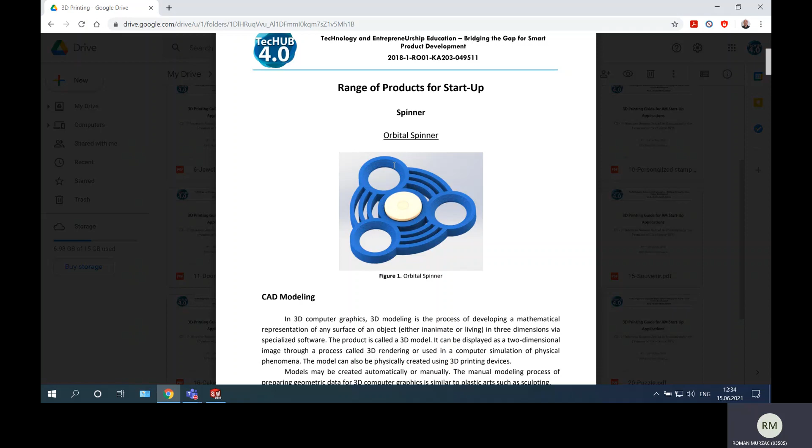Okay, so let's go. Let's see the first sketch. The first sketch is a circle of 22 millimeters.

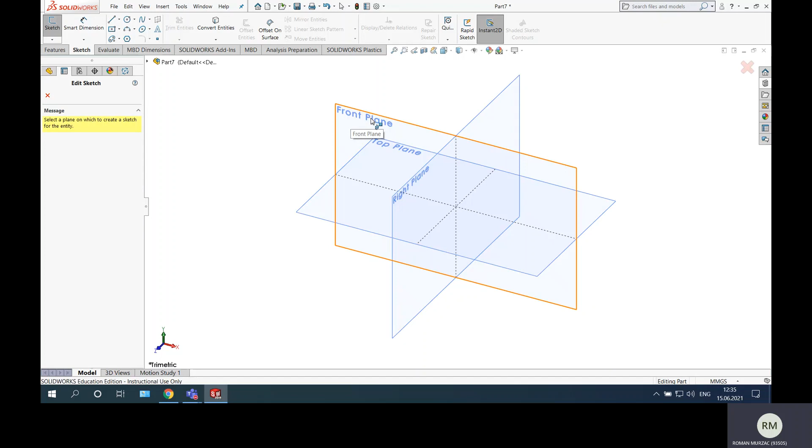Take a new part, open the part, and in this part create a sketch. First, switch to the sketch menu, take the sketch command, and choose a plane to create the sketch. Here we are. Take a circle, draw it from the center of the sketch, and put a dimension of 22 millimeters.

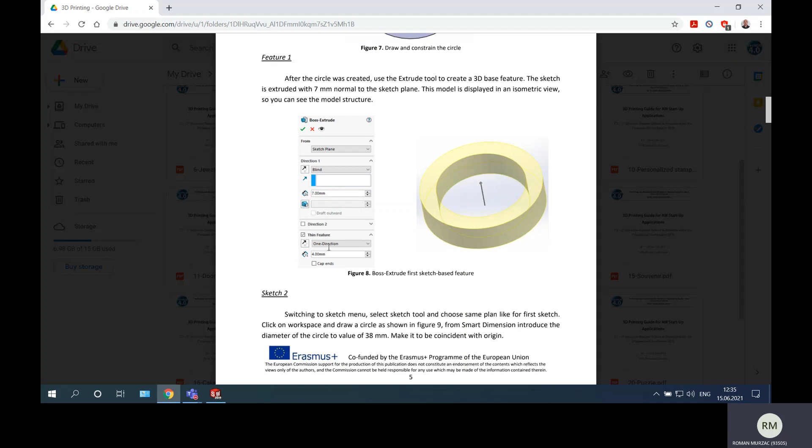This is 22. After that, exit from sketch, extrude it with 7 millimeters, and make a thickness of the wall of 4 millimeters, external, of course. Exit from sketch, go to features, take extrude, say 7 millimeters, and here put on thin feature and say 4 millimeters outside.

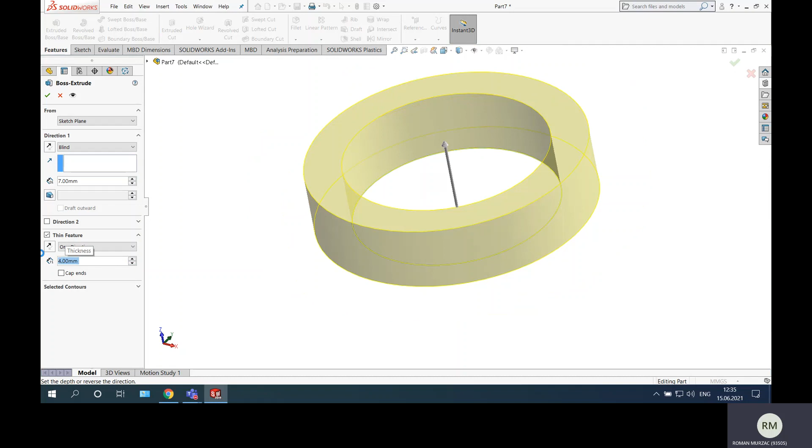And we obtain the ring. So now we have a ring here. Okay, let's see the second sketch.

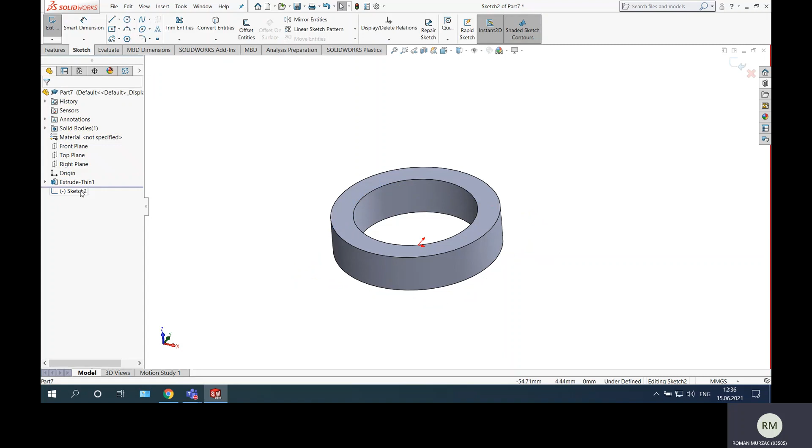The second sketch is a circle with a diameter of 38 millimeters. So just take the same plane, look perpendicular to it, and create a circle with 38 millimeters. I suppose the parameters for extrude will be the same.

No, it's not the same, it's 2.5. Here is the explanation why: because the first ring here will be a bearing. We will create an assembly and here will be a bearing, so this one should be 4 millimeters in order to be able to keep that bearing here.

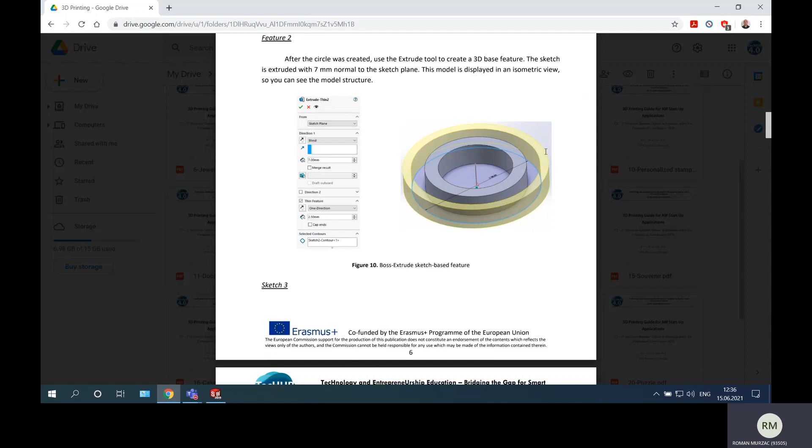The second one and the rest of the rings should be smaller, with a small thickness, just because they are a design element. So go to feature, extrude, again 7 millimeters same height, thin feature, and here is 2.5. Okay, so we had 2 rings already.

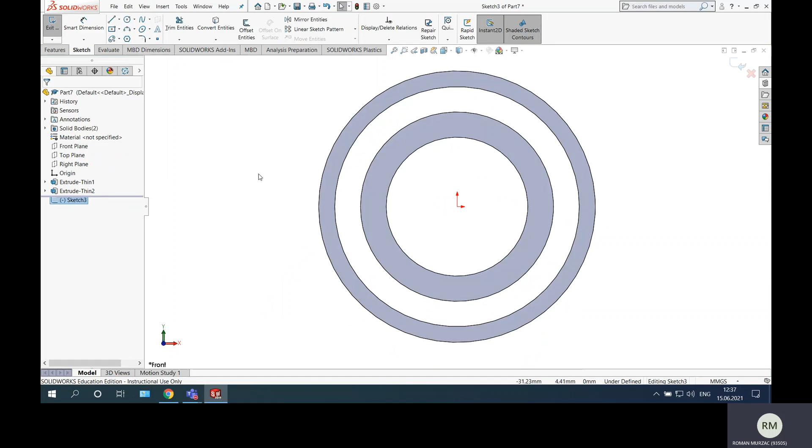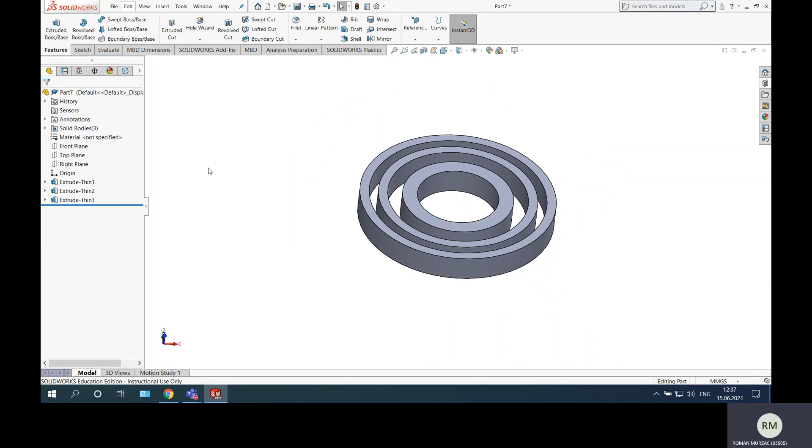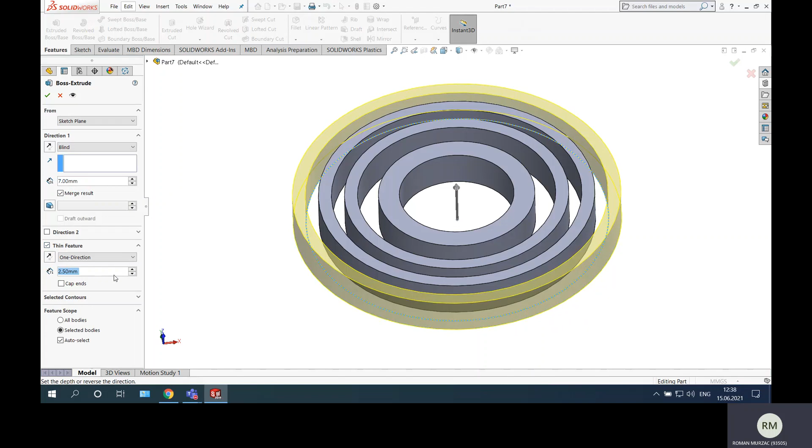And we have the fourth one, 58 millimeters. So repeat again, fourth time: 58 millimeters, like this, put the dimension 58, exit from sketch, rotate, go to features, take extrude 7, and here thin feature 2.5. Very good, so we have 4 rings now.

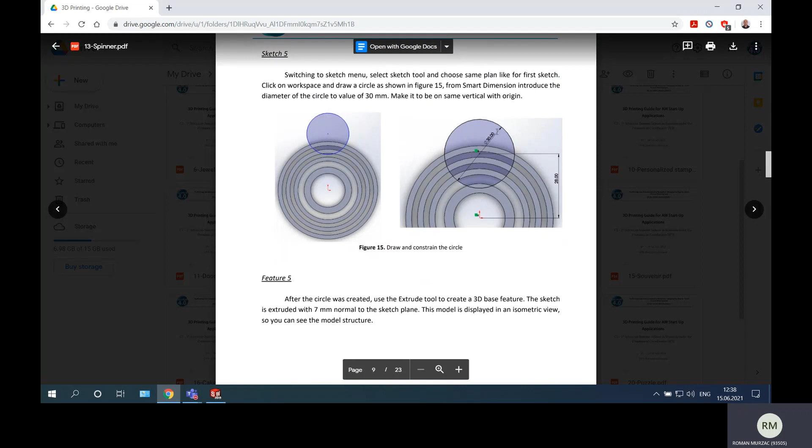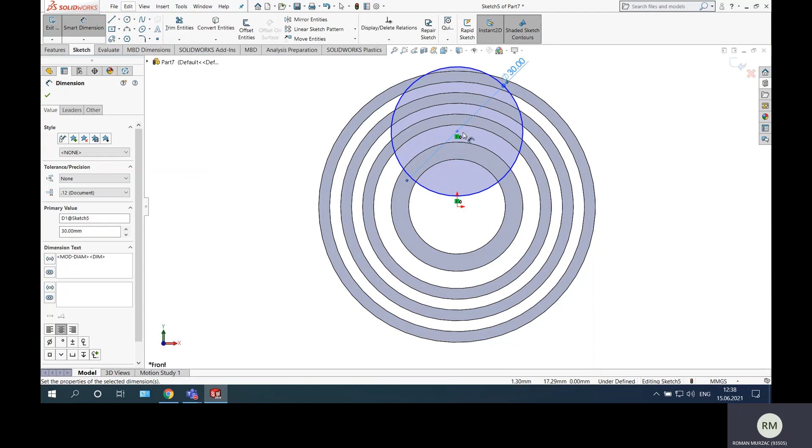Okay, so the fifth sketch is a circle of 30 at a distance of 28. So create again a sketch on the same plane, on the front plane, look perpendicular to it, create a circle somewhere here. What I know about this circle: the center of the circle with the origin of the sketch should be on the same vertical dimension.

The circle should have 30 millimeters diameter and 28 millimeters distance between centers. That's it. After that, apply and extrude with 7 millimeters on this circle, so it will be a full body. Just go to features, take extrude and say 7 millimeters. And as you can see, this cylinder connects all the rings together.

Okay, and what we will do next? So we will do switching, sketch menu, choose surface on the previous step.

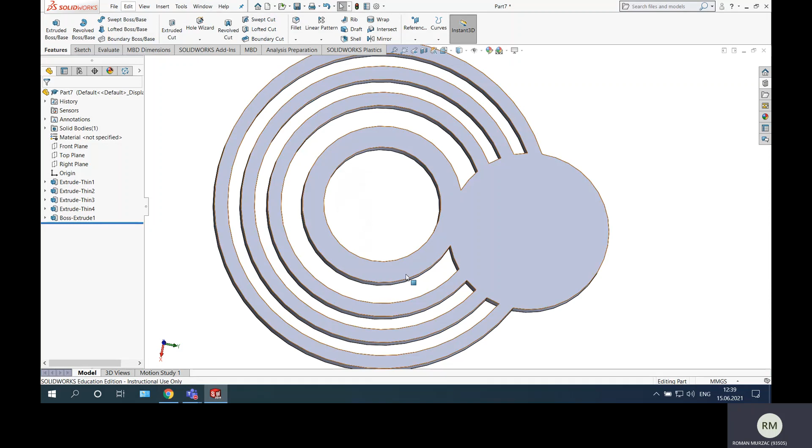Okay, so we will cut. Here create a sketch, and in the center of this circle just create another circle with a diameter of 25 millimeters. Exit from sketch and extrude cut this circle.

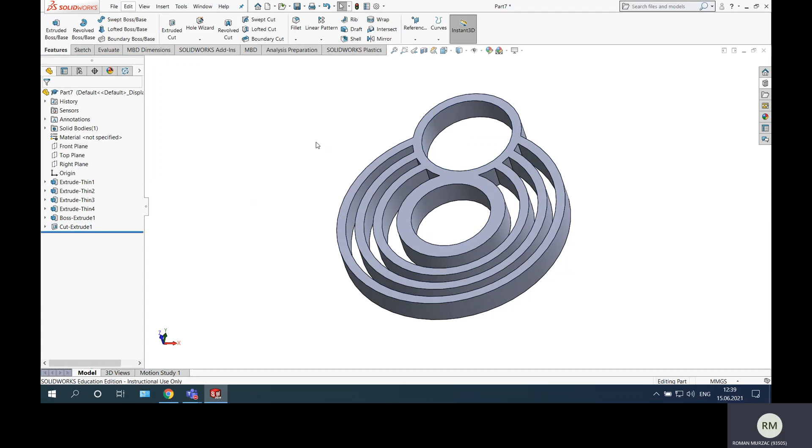In order to obtain this, we should set a through-hole option, and we obtain a hole inside of the cylinder, and now this is also a ring. So with this ring we will go further, and after the circle was created, use extrude cut.

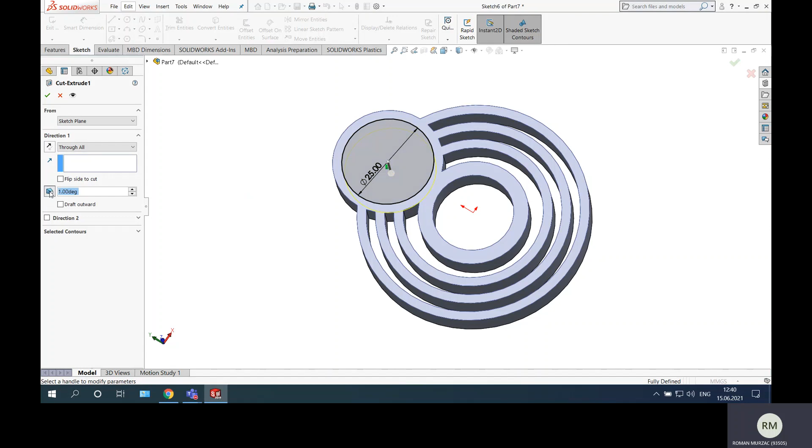Okay, it should be at 45 degrees. So what we should do is select draft on and say 45 degrees, and this will be like this. And it should be just 3 millimeters, not 7.

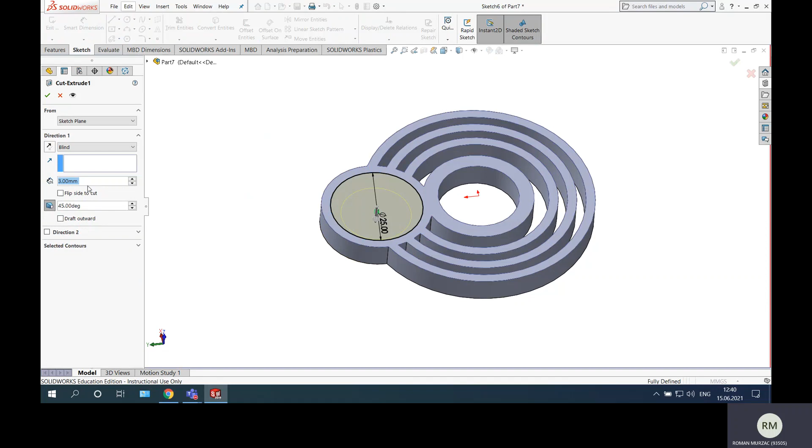So here not a through-hole, it should be blind, and 3 millimeters. Yes, something like this. 3.5, sorry, again. Yes, 3.5 instead of 3, like this. Good, so we obtain this.

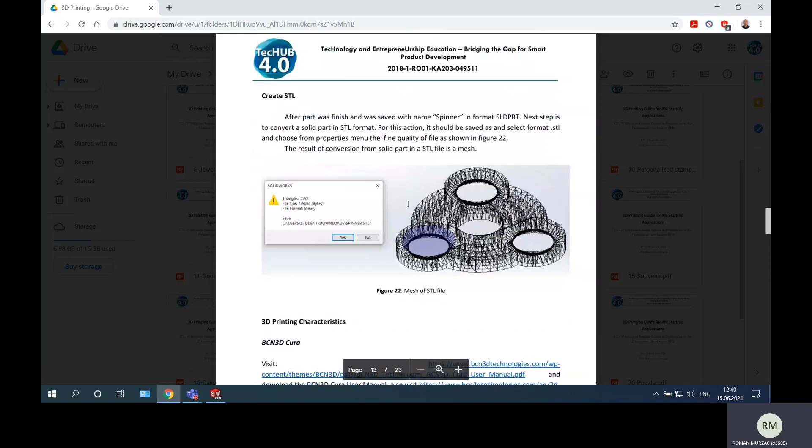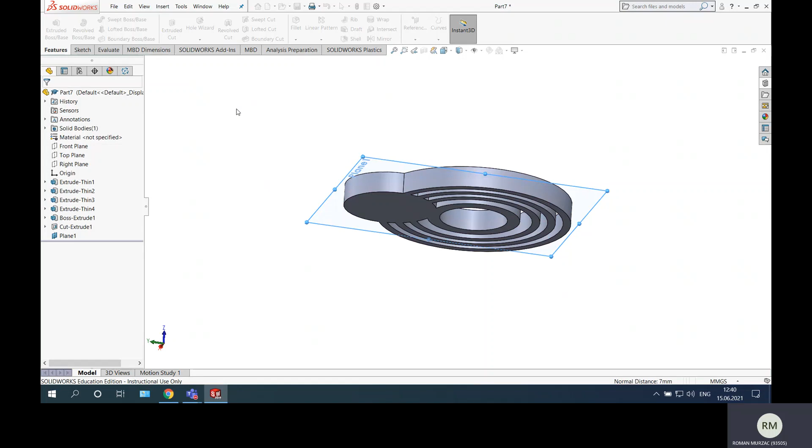After that I will do a circular pattern of this around. But first of all I should create a mirror. So I will choose mirror, and the mirror plane will be between these two surfaces. I take a plane and say between this and this surface create a plane. So I have the middle plane, you see it. Now just take mirror and say around this plane, mirror this feature, and I obtain this.

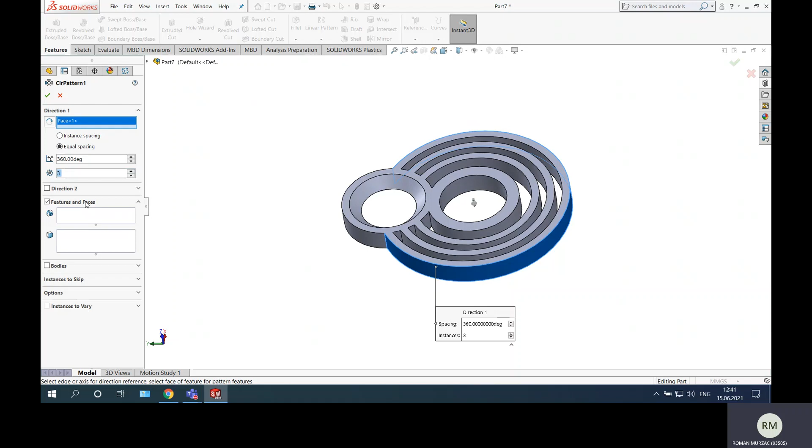Good, hide the plane and now create a circular pattern, and say around this circle I want equal spacing at 360 degrees, 3 features. Which features? This one, and of course this one.

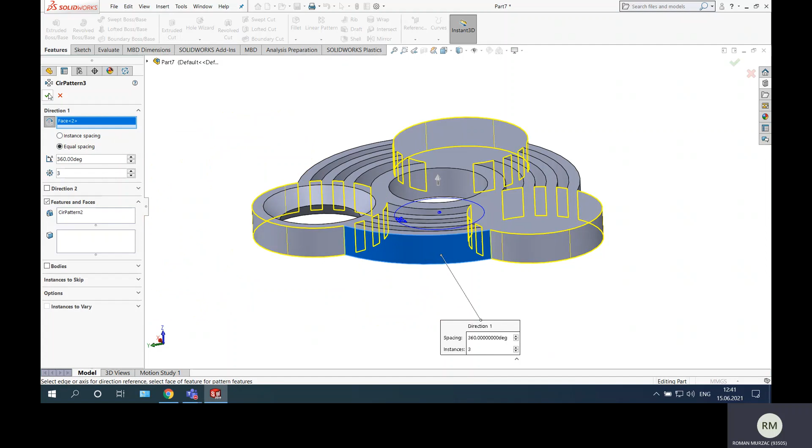Something is not working properly. Let me check what doesn't work. And if I do just this, yes, this works. Let me check again, circular pattern, and I want this. Here, delete and say around this. Nope, it doesn't work. Let me check. Circular pattern around this one, and I want to take this cut.

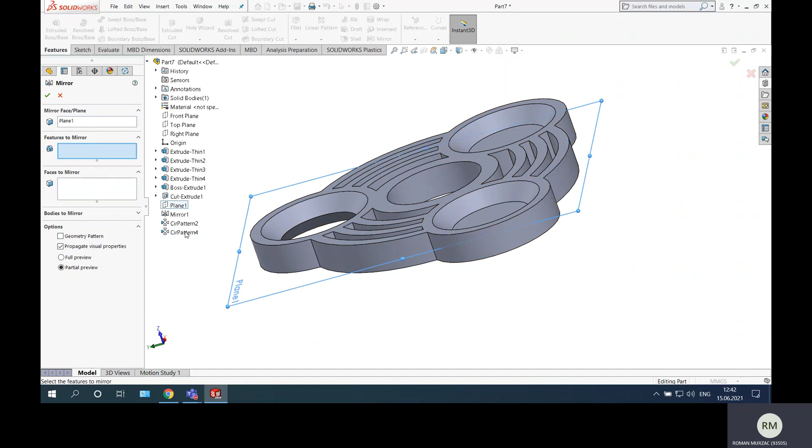Yes, it worked. Mirror, and now try on this plane to mirror this. Yes, so I obtain what I want to obtain. Good, so I have the body, and here is the body. Let me see if we had another feature.

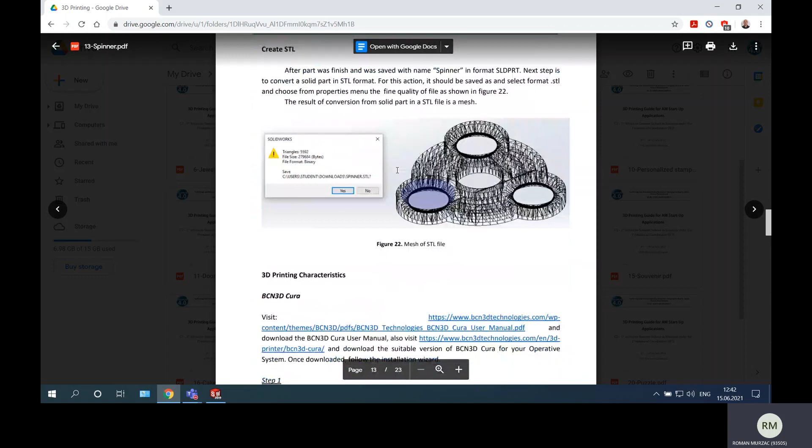No, now we convert it to STL and save it in that format. But first of all, I want to do a chamfer, a small chamfer of 0.5 millimeters on one surface, on this edge, because here we will assemble the bearing, so I want to have a centered surface here.

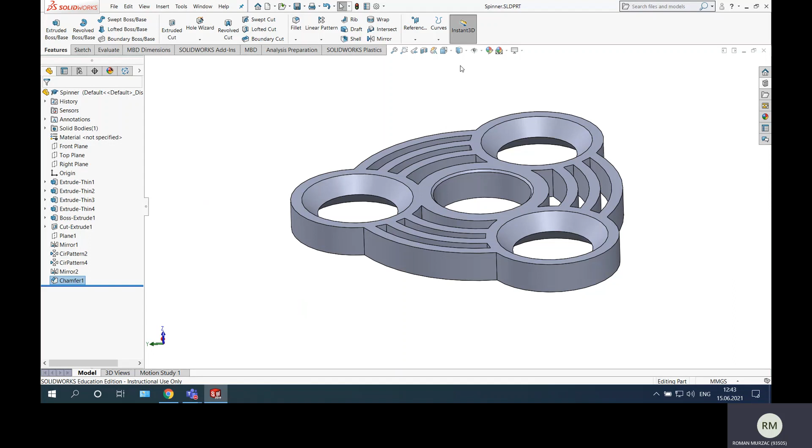Okay, just save as spinner body. Yes, spinner, save. And I will show you how we can bring the bearing and assemble it with a bearing. But first of all, I will close this and open an assembly.

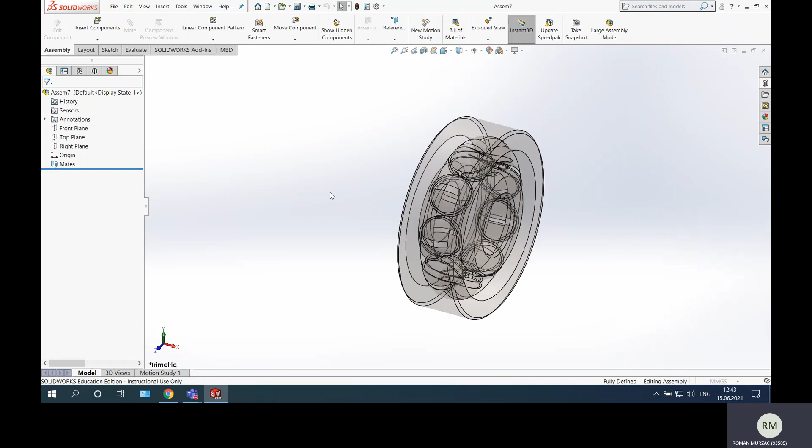So now we are in the assembly. We will go to the design library, open the toolbox. So I open toolbox, go to ANSI Metric, I need bearings, I need ball bearings, and I need a radial ball bearing, of course. And from here, from the list, I will set up the settings for this bearing.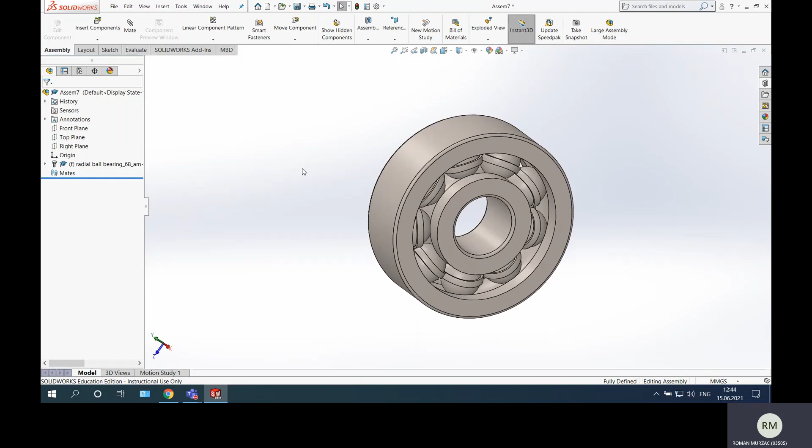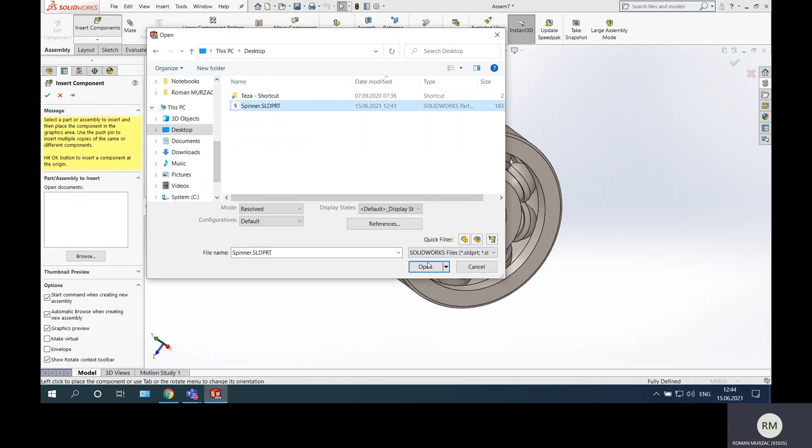I open this bearing, yes, because I want to save it like a part, or I can just directly work in assembly, insert my own component, the spinner, and bring it here and assemble it with this bearing. So I say mate this hole with this cylinder to be concentric, this surface with this surface to be aligned, and now my bearing is constrained here.

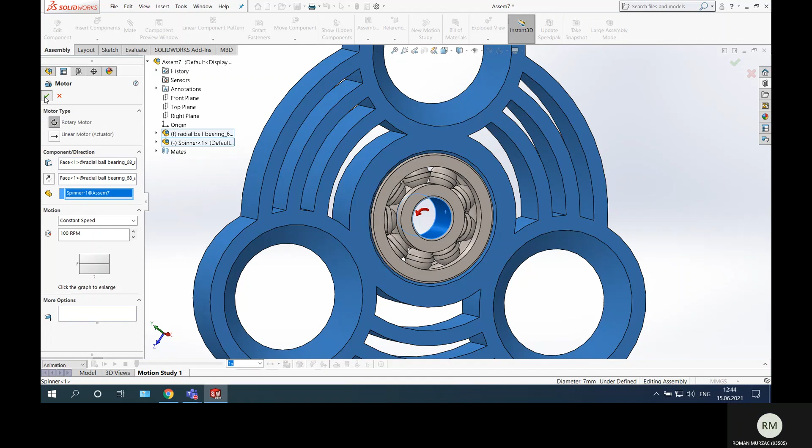And of course I can make this rotate, go to motion study, say motor, rotary motor, of course, and I want this body to rotate around this, to go on a loop, yes, and now just look how this works. So around my bearing, the body of the spinner is rotating.

Just stop it, and that's it. That is the finished product. It's a spinner that we will make, we will manufacture it with additive manufacturing. Thank you. See you on the next video. Bye.